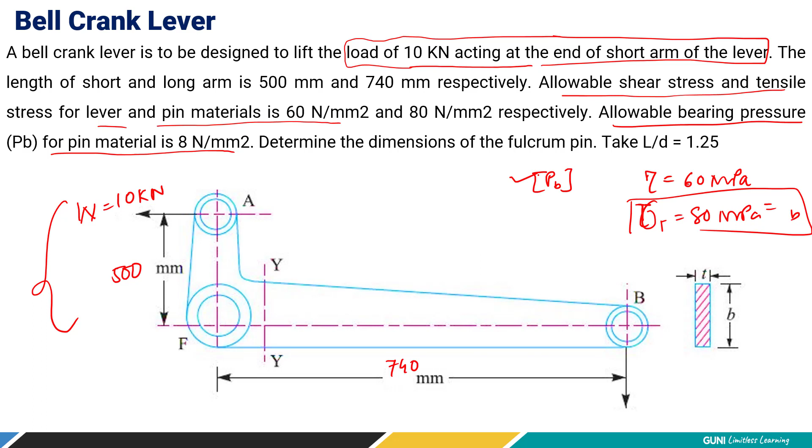Allowable bearing pressure for the pin material is 8 Newton per millimeter square, which we are going to write as PB. It's a bearing pressure, basically a compressive stress, but because the lever pivots about a fulcrum pin, it is a dynamic condition, so we cannot use directly the compressive stress. Instead we have to use the word bearing pressure. So it is given as 8 Newton per millimeter square, or simply 8 megapascal.

Second, the relation of the pin is given: L by D is 1.25. That means length of pin is 1.25 times, 25% higher than its diameter. This relation is given to solve the problem.

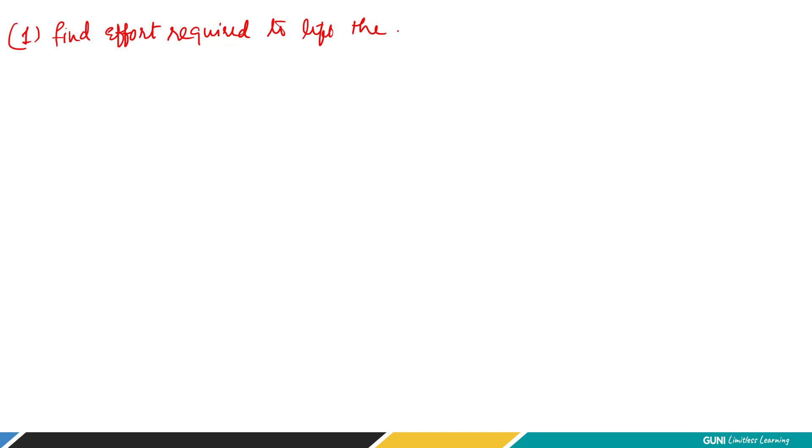So the first step is we must find the effort required. Here the load is given to us, but we need to find how much effort is required to operate this lever to lift this load of 10 kilonewton. By definition of lever, we must have a lower value of effort, otherwise the definition of lever has no meaning, because lever is a device used to apply less effort and to lift the higher load. So the first step is to find the effort required to lift the load of 10 kilonewton.

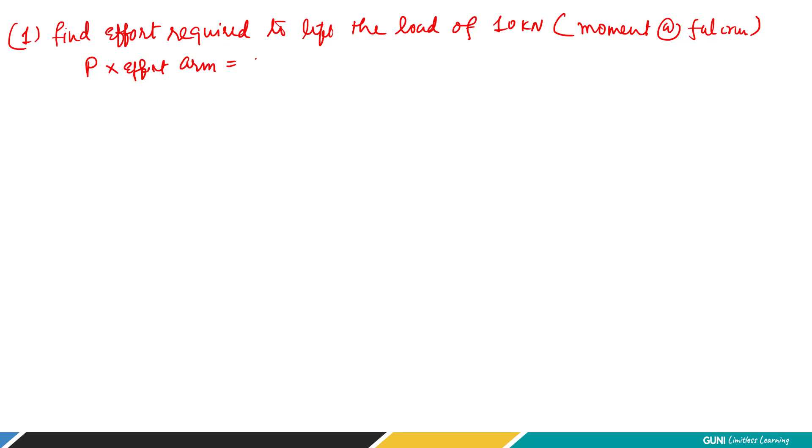How can we find it? Very simple, by considering the principle of moments, taking moment about the fulcrum. So effort into effort arm is equal to load into load arm. How much is it given? P into 740 millimeter is equal to load given 10 kilonewton, I am keeping it in terms of kilonewton, into 500. So from this we can find the effort required. P is going to be 6.75 kilonewton, so this is the effort required.

Just try to focus on the values. Now load we are lifting is 10 kilonewton and the effort required for that is 6.75, so here the effort required is very less. Now from this moment about fulcrum principle, we can say if we increase this effort arm, we'll still have a lower effort, but there is always a limitation of space, so we cannot enlarge the lever for an infinite distance. So here, by considering data, we have to apply this much of effort in terms of kilonewton.

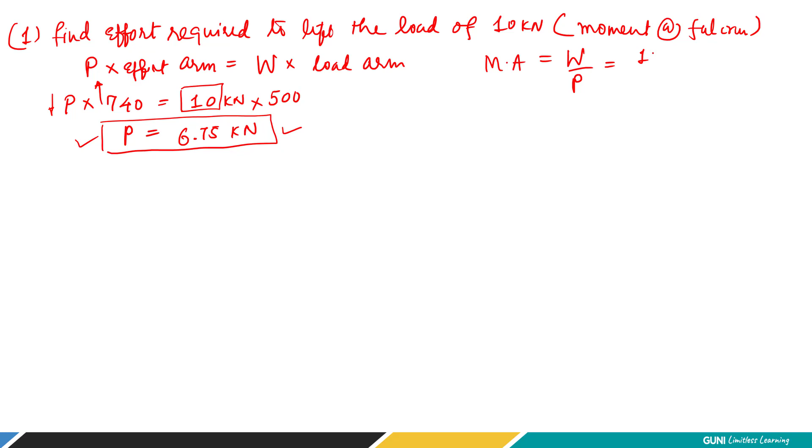Now, if you want to find out mechanical advantage, what is that? Load divided by effort applied. Here it is 10 kilonewton and the effort we applied is 6.75, so the output is 1.481. So this lever that we are considering is having mechanical advantage of 1.481, that means we can have a 48% lower effort with respect to the applied load. This is the advantage.

Now let's find the reaction force. The second point is finding reaction force. You do have to write in similar manner in exam. Reaction force RF on fulcrum pin.

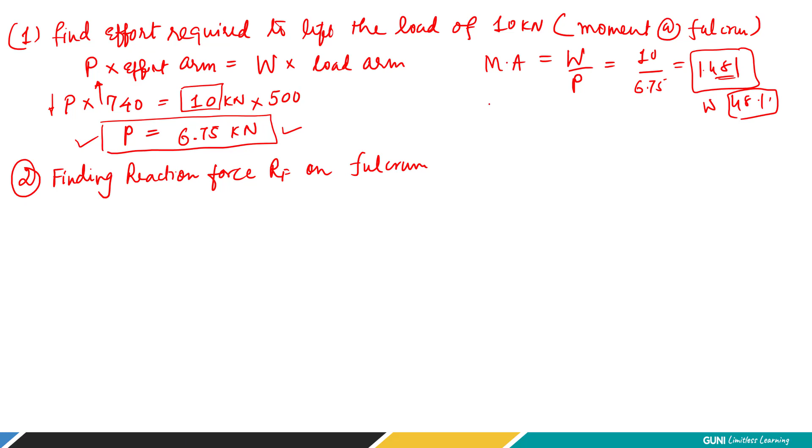Lever is a single entity. Here we are applying W, we are lifting W load, and here we are applying the effort P. So these two forces, if you consider the law of parallelogram or triangle law, this is going to give you the equivalent force.

We are replacing W and P, and finding a single force called reaction force, which is acting on this fulcrum pin. That is RF. So on fulcrum pin, reaction force can be found out by this equation: R equals square root of W square plus P square minus 2WP into cos theta.

But here, for Bell crank lever, theta is 90 degrees. So this term becomes zero. So we have the reaction force equation simplified as W square plus P square.

So let's put the value of load, that is 10 kilonewton, and this is 6.75. So let's find the answer for R. It comes out to 12.06 kilonewton.

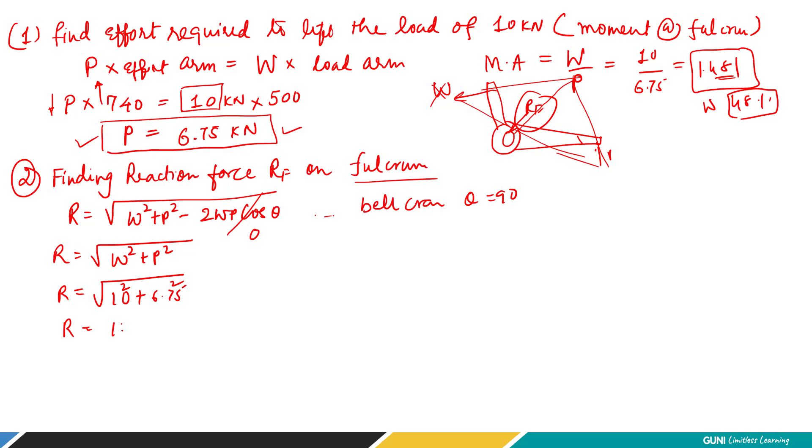So this much load, by simply finding the reaction force, or you can say the equivalent force by replacing these two values, we get one force giving a 12.06 kilonewton effective load acting on this fulcrum pin. This is also called resultant or reaction force.

Now from this we are going to find the dimensions of the fulcrum pin. Let's say this is the design of fulcrum pin.

The first point is how a pin is going to fail. The first failure mode is bearing failure. Because of this reaction, there are chances this pin is going to have a compressive failure. But because the lever is swiveling about the fulcrum pin every time, it's a dynamic situation. So we are going to consider its bearing failure.

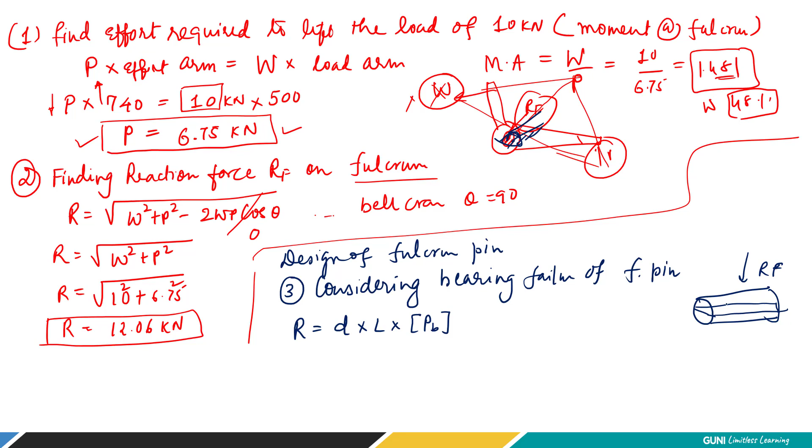So for bearing failure, the equation is R equals D into L into PB. Now how does this come? Very simple. Let me draw the bearing pin. Here we have to consider this projected area, on which the reaction force R is acting. So this area is basically D into horizontal length L.

Now here we are going to take L as 1.25 times D, which is given in the numerical. Because both terms are unknown, we cannot solve at a time, so we have to take a relation. A rectangle means an area, so we can take a proportion of these sides. Here the proportion taken is that length is 25% more than the diameter.

So here we can replace it: R is 12.06 kilonewton, that is 10 raised to 3, replacing kilo. Then D into 1.25D, and the bearing pressure given in the numerical is 8 megapascal, that is 8. Please watch out for the units - you must have a common unit on left side and right side. Here it is Newton, so the bearing pressure has to be taken in terms of Newton, not kilonewton.

So finding this diameter D of the pin, the answer is 34.7 millimeter. So we can take it as 36. We keep the diameter of pin as 36. So length will be 45, 25% higher as given in the relations. This is the dimension we found out based on the load acting.

How much load is acting? Reaction force 12 kilonewton. So for the given load, you have to keep this much dimension of the fulcrum pin, which will give you safe working under the bearing failure condition.

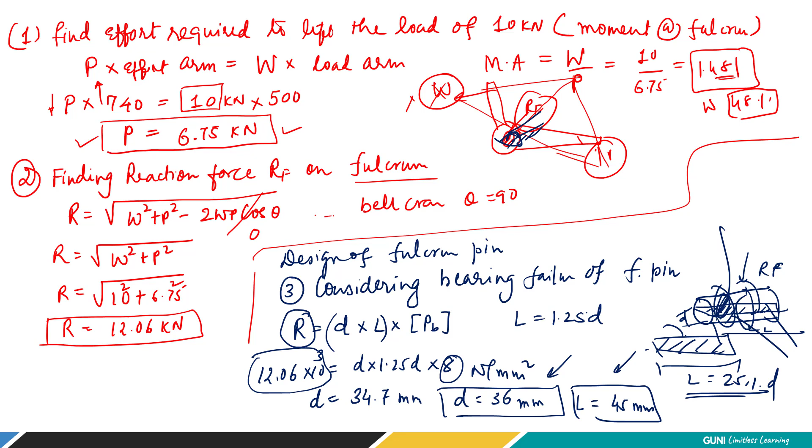Now the same pin subjected to bearing failure is also subjected to shear failure. It can happen that because of the boss connection of the lever, there are chances the fulcrum pin is going to fail from this location and this location. So it shears off from this location and this location, both being circular areas.

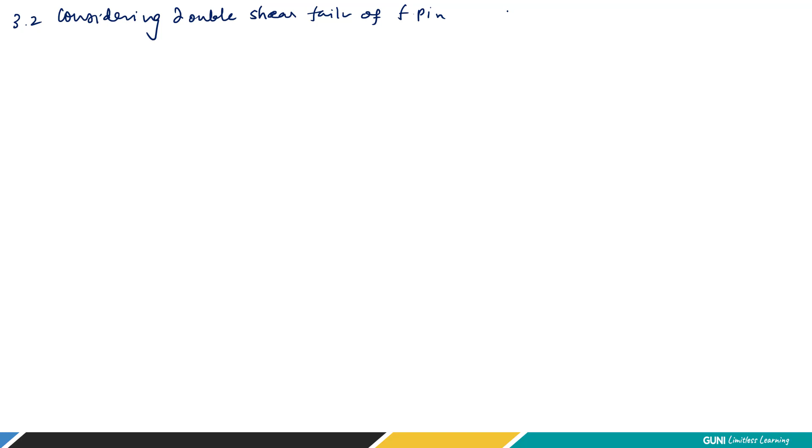Let's try to consider it. So here, considering double shear failure of the fulcrum pin - how much is it? The same reaction force is causing the double shear failure, so the equation is pi by 4 d square into tau, multiplied by 2.

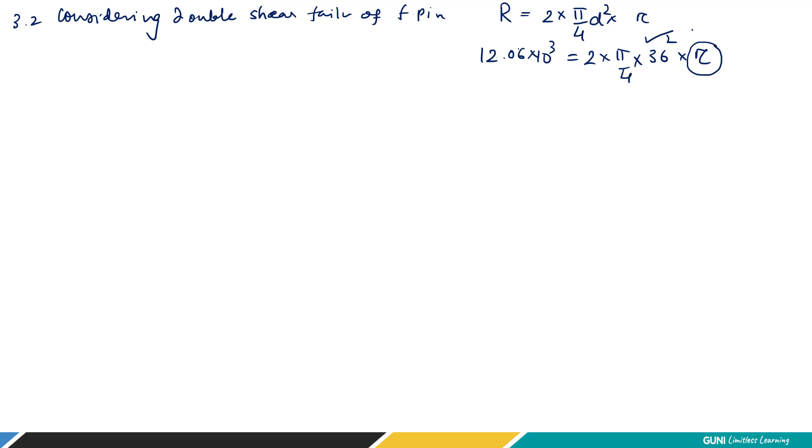So here reaction force is known as 12.06 into 10 to the power 3, equals 2 into pi by 4. Now we know the diameter of pin, that is 36 square. Let's find the induced stress - here we are going to find the shear stress induced. We already have the dimension that we found out from the bearing failure, but the same dimension must be proved to be safe under the working loading condition in shear failure.

So we are going to find the shear stress in this case, and that comes out to be 18.61 megapascal, right? Now the permissible stress given, induced stress is 18.61 for the diameter D equal to 36. What does this mean? The pin dimension we found, which is 36 in diameter and length is 45, is going to work safely in bearing failure as well as in shear failure. But in shear failure, how much stress is developing? 18.61.

We have to compare with the given value. Here the given value is 60, right? So permissible is 60 and the induced stress is 18. So you can say the induced stress is much less than the permissible stress, which is 60. So here we can conclude that the fulcrum pin is safe in both situations, that is bearing failure and shearing failure. So this is our design.

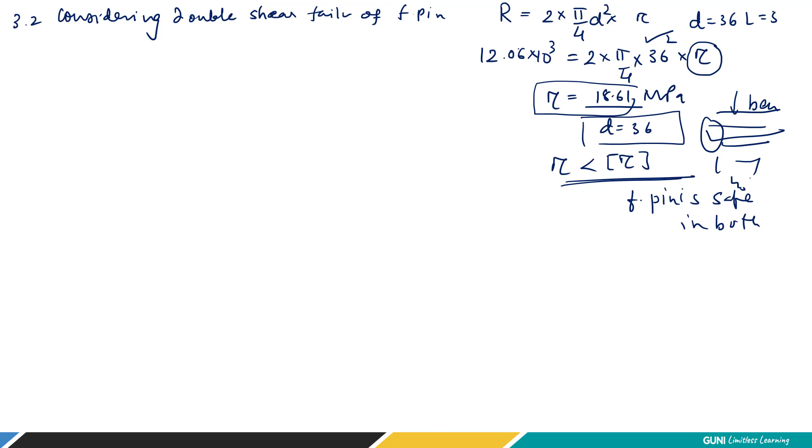So fulcrum pin dimension is D equal to 36 and length equal to 45 millimeters. So this is our final dimensions. Now let's talk about the cross sections, right? So point number 4, lever cross section.

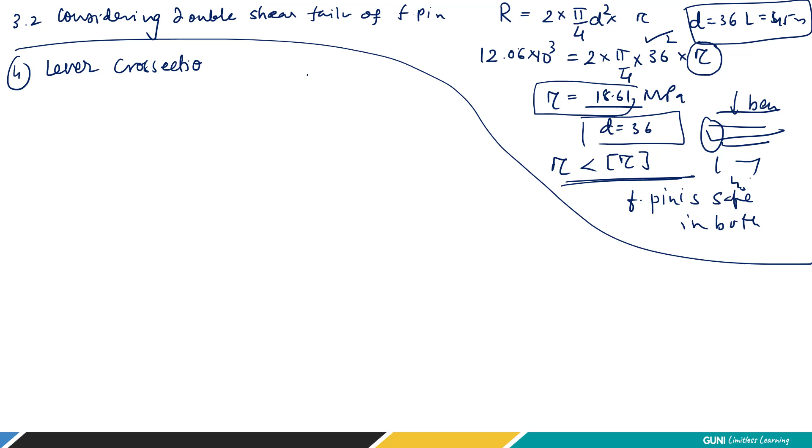Now try to understand what this means. Let me draw over here so you can understand very well. So this is shorter arm, this is longer arm. Let me explain on the main figure. Now here, let's say this is the fulcrum pin. This is the point from where the lever behaves like a cantilever beam, right?

So here what do we need to consider? Fixed point, right? So this is the cantilever beam. You are applying an effort of, let's say, 6.75 kilonewton, and the distance is given. So because of this force and its perpendicular distance, it is going to create a moment. So the moment is on the right side as given, right? So because of that, the stresses will be developed at this location.

Bending stress or bending moment will be maximum at this location. If you recall your knowledge of strength of materials, the bending moment value is like this. It is maximum at the fixed point, right? It is maximum, and gradually it reduces to zero because the reference dimension or the linear distance is getting zero, right? So this is the triangular pattern of bending moment.

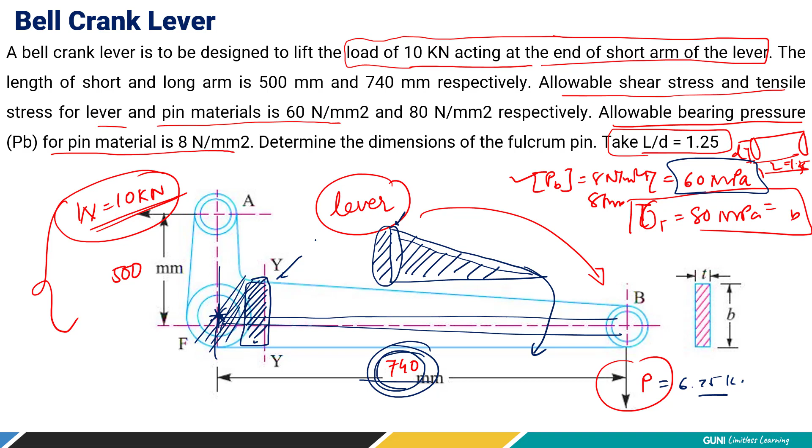And because of that, the bending stress is also higher at this location. So bending stress is nothing but bending moment divided by sectional modulus Z, right? So here at this location only we have to find out what is the height of section and what is the width. We are not going to find the rectangle section at other locations, because there the bending moment is very low. As a design engineer, we must concentrate on the maximum value of stress.

So in the case of the lever, the maximum stress occurs only at this location because the bending moment is maximum at the fixed location, or you can say where the lever is pivoted by the fulcrum pin, right? So here we are going to find it. So the section that we are going to find is at this location. Mostly a rectangular section is preferred, like a column and beam, right?

So here the cross section is like this. This is height and this is width, okay? So you can keep an I-section as well, but it depends on how much load is acting and how much bending is occurring, right? But generally, for the sake of understanding, let's go for the rectangle section. So the lever section can be found out by bending stress equals bending moment divided by sectional modulus Z.

Where will we get the dimension from? We will get it from here. So Z is simply the moment of inertia divided by Y. Y is nothing but the extreme distance of the extreme fiber, where the maximum bending stress is occurring. That is, let's recall the bending formula or bending concept, right?

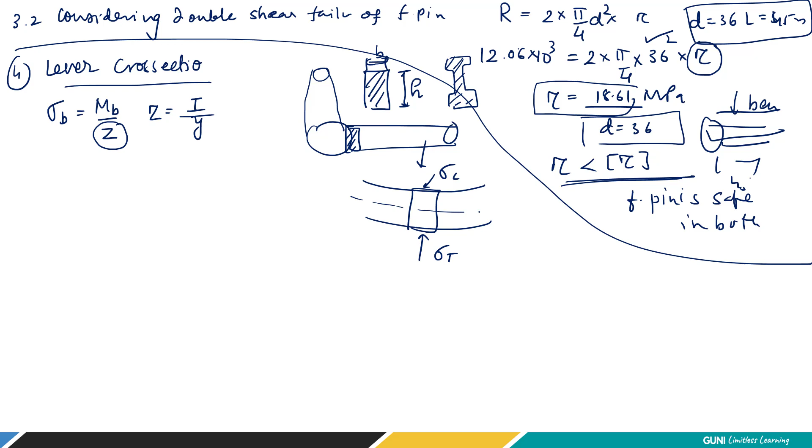If you bend it like this, the inner portion is subjected to compressive stress and the outer fiber is subjected to tensile stress. And from the neutral axis, we want to find out the location. So depth is H and the half is Y. So Y means H by 2. So we are going to find the extreme fiber where the maximum stress is occurring.

Just recall the pattern of the stresses: on one side it is compressive, on the other side it is tensile. Both have the same value but opposite nature because of bending.

Here we are interested to find the moment of inertia value, that is 1 by 12 BH cube. Just recall your knowledge of moment of inertia from strength of material. Here we are going to replace Y with H by 2, which is the location of the extreme fiber from the neutral axis. So we cancel out one H, and the total becomes 1 by 6 BH square.

Now let's find the bending moment. Bending moment can be found by effort into effort arm, or simply load into load arm. Both are going to give the same value. Here the load given is 10 kilonewton, and its distance is given as 500.

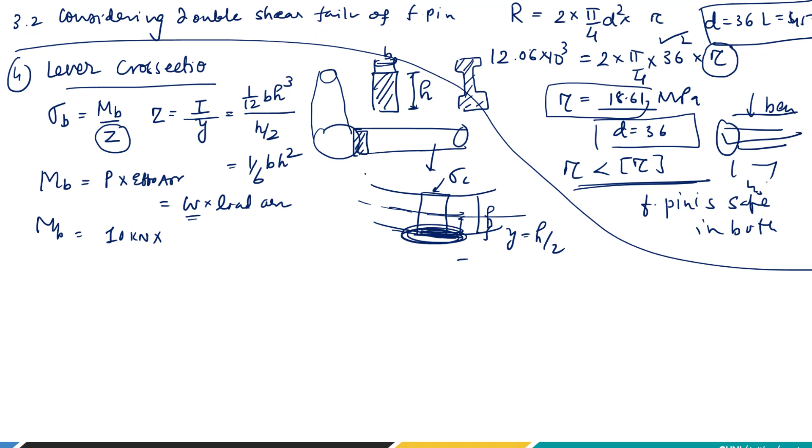So the moment will be 5000 kilonewton into millimeter, because the load is in kilonewton and the distance in millimeter. Now let's use this equation: bending stress equals bending moment divided by section modulus. So it is 5000 into 10 raised to 3, and we are replacing section modulus with 1 by 6 BH square.

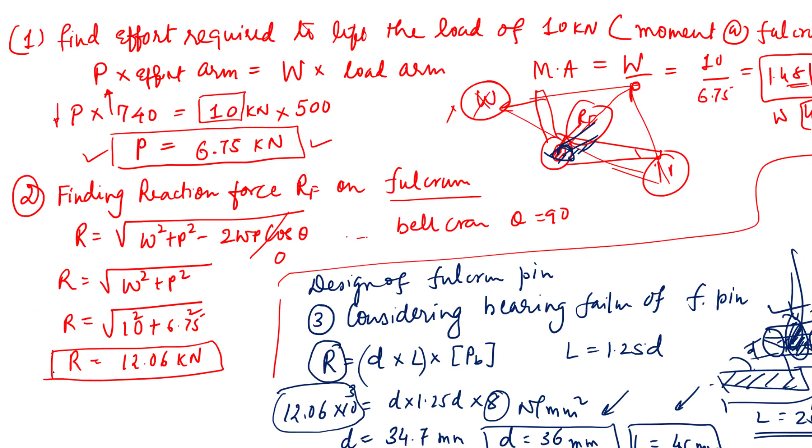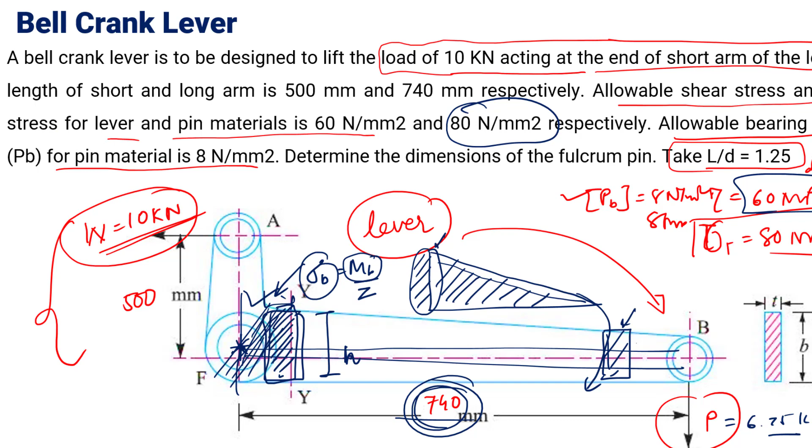You know that the bending stress given is 80. That value is given in the numerical. Because of bending, the stress produced is either compressive or tensile in nature. Here it is given in tensile nature, so we have to consider it equivalent to the bending stress. The permissible value is given.

You're not allowed to go beyond this value. So one variable is known to us; the bending moment we found out, but we don't know the B and H values, which is the dimension we are interested to find. So together they are unknown, and we cannot solve this equation directly. We have to take a relationship.

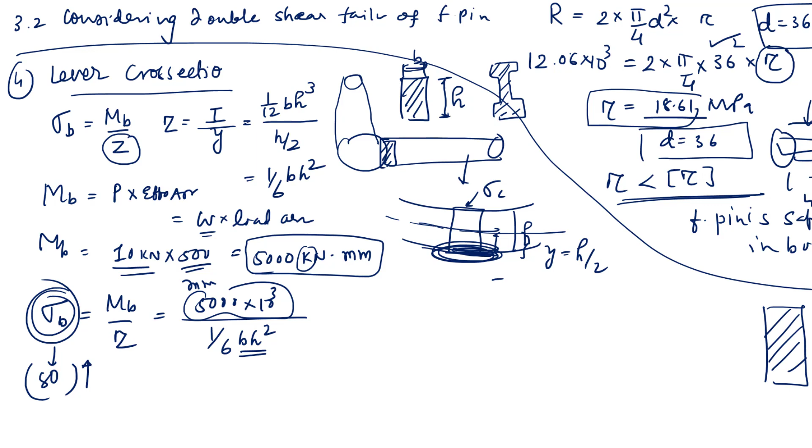Because the section is a rectangle, we can take a relation between the sides: this is H and this is B. Since it is not given, we can assume it arbitrarily. So we take H equal to 3 times B. This assumption will help us solve the equations.

So let's put it: 80 equals 5000 into 10 raised to 3, divided by 1 by 6 of B and H, which gives us 9 B square. From this we can find the B value. Solving this, B comes out to be 34.66 millimeter, so we take it as 36. Based on that, H will be 108.

So this is the cross section that we have to keep for the lever, for the applied load of 10 kilonewton at the shorter arm and the effort of 6.75 kilonewton at the longer arm. We have to keep this value, otherwise it is going to bend or fail, meaning the stress induced will be more than 80, which is a failure situation.

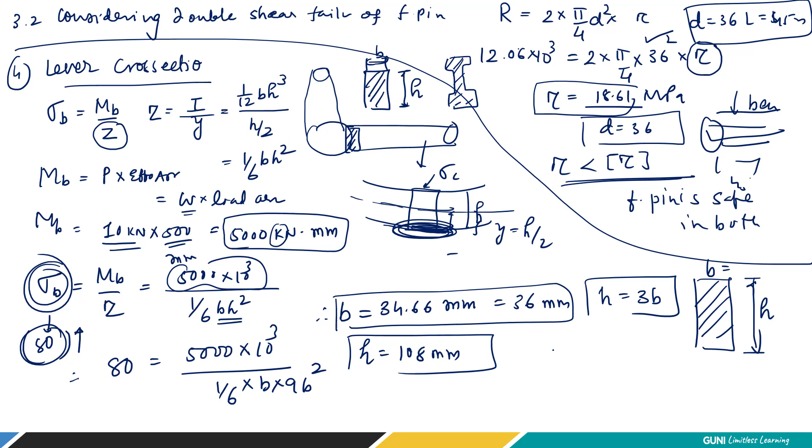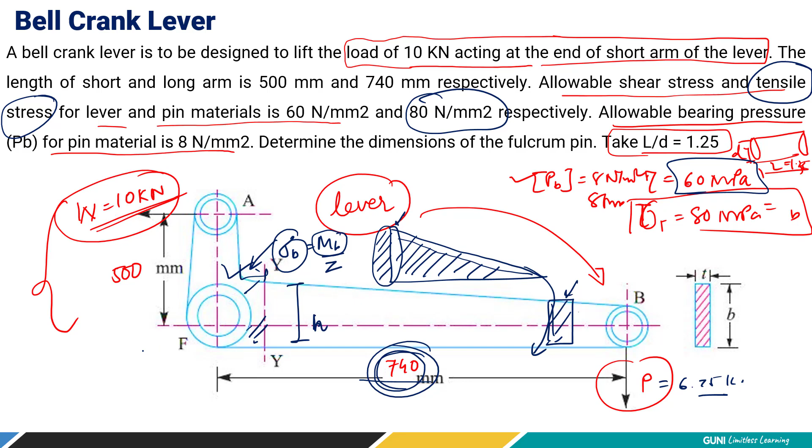So this is how we can solve the design of the lever. Finally, we can find the dimension of the boss. Let me show you on the slides. This is the boss, in which the fulcrum pin is fixed. That dimension is taken as 2 times the fulcrum pin. The fulcrum pin dimension is 36.

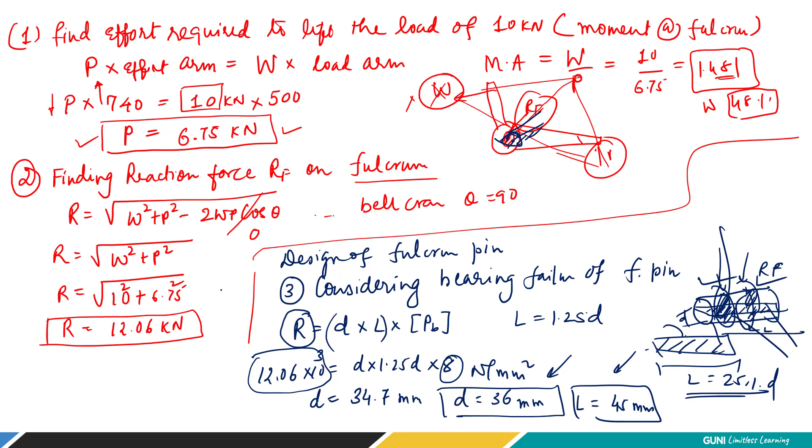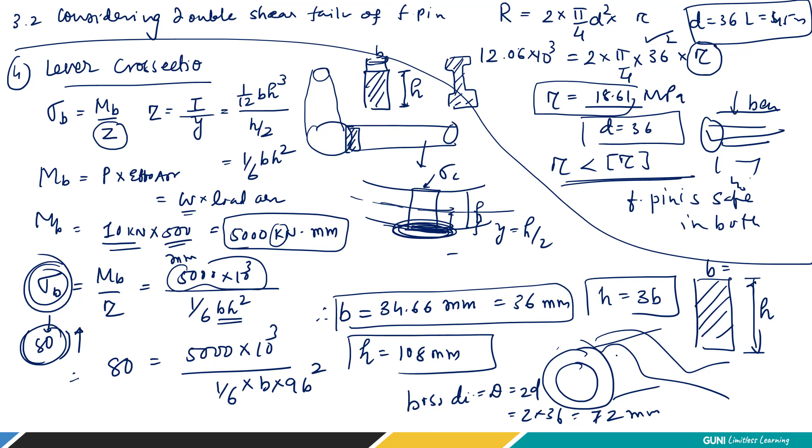So we can say the boss diameter, capital D, is taken as 2 times the pin, so 2 into 36. So the boss diameter will be 72 millimeter. This is the design of the lever.

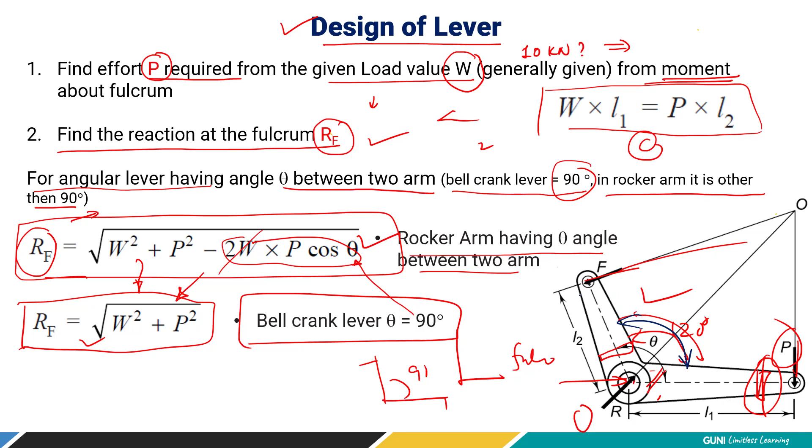Now let's solve one more example, rocker arm. Basically rocker arm is like this as shown in the previous figure. This is the example of rocker arm, where the angle is other than 90 degrees. It is basically used in IC engine. Let me show you in a figure.

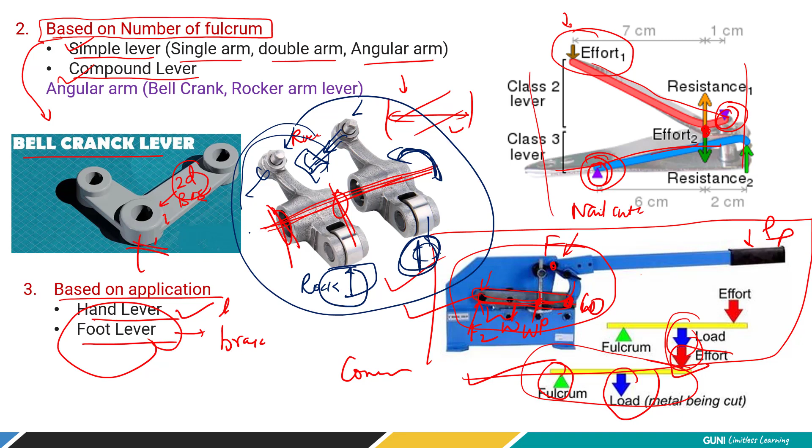So this is the example of rocker arm. This is the tappet end, where we are going to fix a valve which operates in the engine cylinder. From here we provide the push from the cam. I hope you have studied this in theory of machines. The cam rotates and pushes it, so it swivels like this, and that operates the valve, opening and closing it. So this is an example of a rocker arm.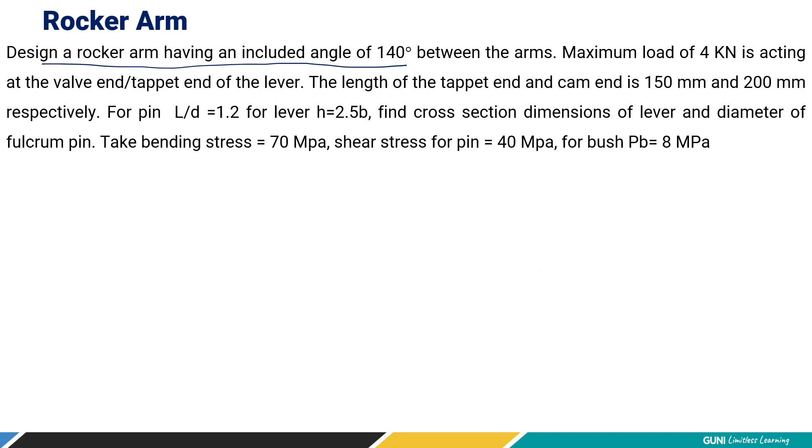So, design a rocker arm having included angle between two arms theta equal to 140 degrees. How much is given? It is given as 140. So simply draw a figure like this to understand it, so this angle is 140 between the two arms.

Now, maximum load of 4 kilonewton is acting at the valve end or tappet end, so here W is 4 kilonewton. And the length of the tappet end and cam end is 150 and 200 respectively. So we are going to apply effort P.

Now for the pin, length to diameter ratio is 1.2, so L is equal to 1.2 times D. And the lever cross section is given as H is equal to 2.5 times B. So the relation is given for the dimension of lever and the diameter of fulcrum pin.

Take the bending stress as 70 megapascal. And the shear stress is 40. And the bearing pressure is given as 8 megapascal. Now let's design the cross section.

The first step is always to find effort P required. That comes from the principle of moment, moment about the fulcrum. So P into effort arm, equals load into load arm. So P distance is 200, load is given as 4 kilonewton, which I'll keep in kilonewton.

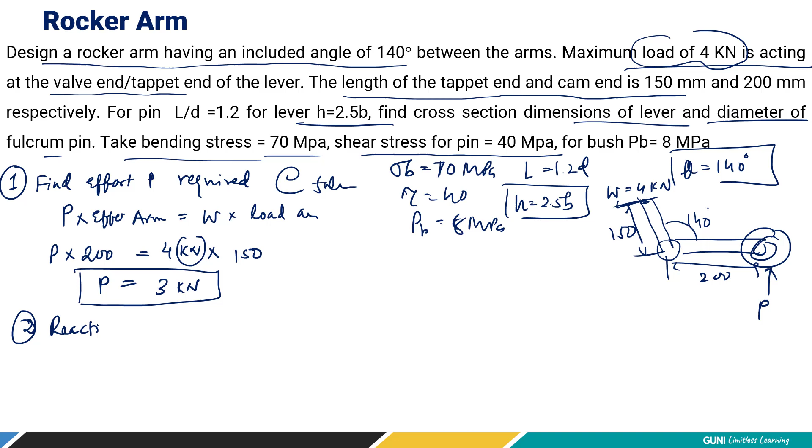Now let's find the reaction force on the fulcrum pin. Here we have to use R equals square root of W square plus P square minus 2WP into cos theta. Because theta is given as 140, not 90, we have to replace theta with 140. So for reaction R: W is 4 kilonewton, effort is 3 kilonewton, 2 into 3 into 4 and cos 140.

You can calculate using a scientific calculator. So it's going to be 6.58 kilonewton. This is the final answer for reaction force RF acting on the fulcrum pin. So by using this force, we have to find out the dimension of the fulcrum pin.

So let's find point number 3: design of fulcrum pin. Considering bearing failure first. So that is R, D, capital length and the bearing pressure PB.

So here R we found out to be 6.58 into 10 raised to 3, we simply remove the kilo. Then dimension D, length relation is given as 1.2 times D, into bearing pressure given as 8. So let's find the pin dimension: 26.80 millimeter. So these are the dimensions.

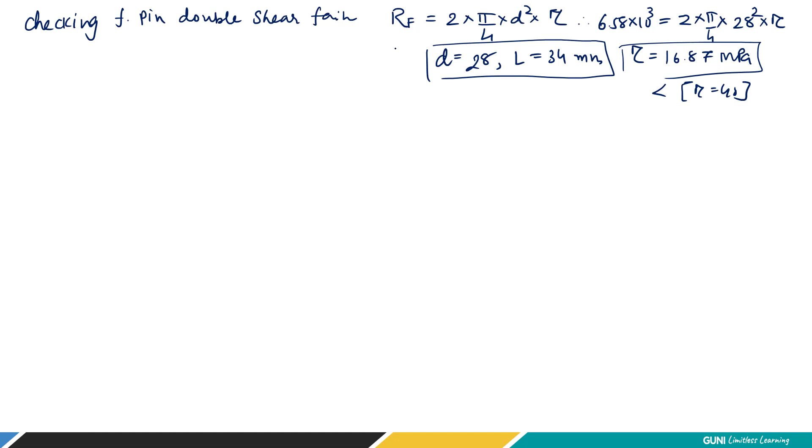Now let's find the cross section. Number 4 is cross section of lever. Let's find it. Considering the rectangle section, that is H and the width B, we have bending stress equal to bending moment divided by section modulus Z. Here Z is going to be 1 by 6 BH square. Now H is given in terms of 2.5 B.

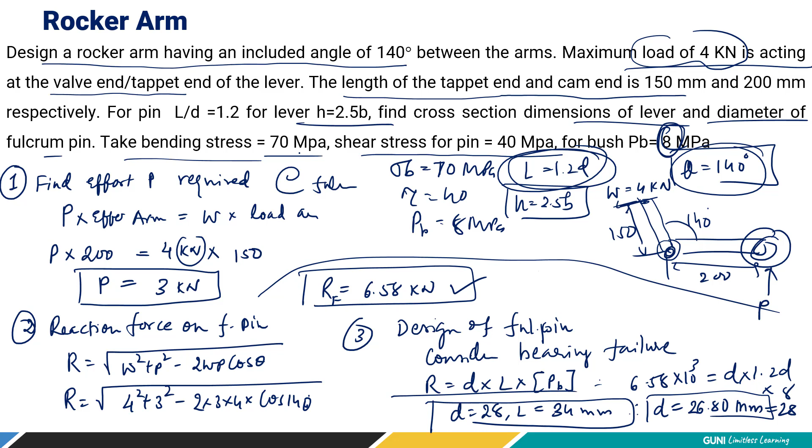Relation is given to us, we can replace it. So let's find the bending moment. Here it is load into load arm. Let's say load is how much it is? 4 kilonewton. 4,000 into its distance. What is distance? Distance is given as 150. So this is load arm distance.

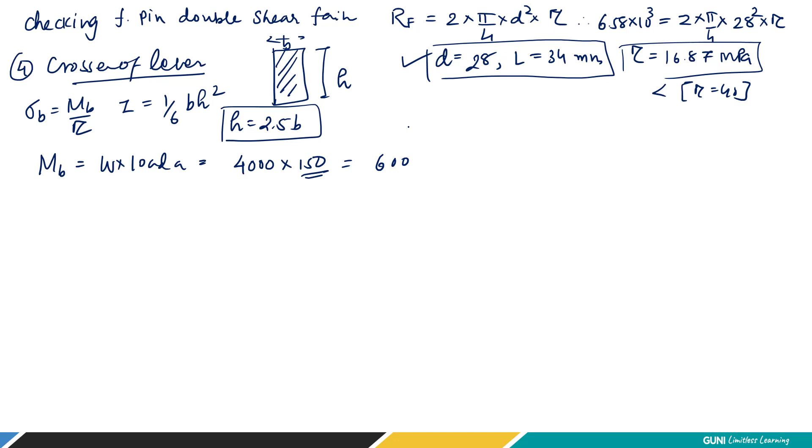So finally we have 600,000 Newton into millimeter. All load is in terms of Newton and distance is in terms of millimeter. So finally 600,000 Newton millimeter bending moment. Now the bending stress given is 70, right? So we have to take 70 value.

So here bending stress equals bending moment divided by section modulus Z. 70 is the given permissible value, and this is 600,000 divided by 1 by 6 into B into H square. So we are going to replace this H. So here it is 70 equals 600,000, you can just take the 6 upside, right?

So to 6, it is B into, we have 2.5 times B square, right? So these are the B terms. Now it is very simple to find out the value of B. B comes out to be 20.18. You can take it as 22 millimeter.

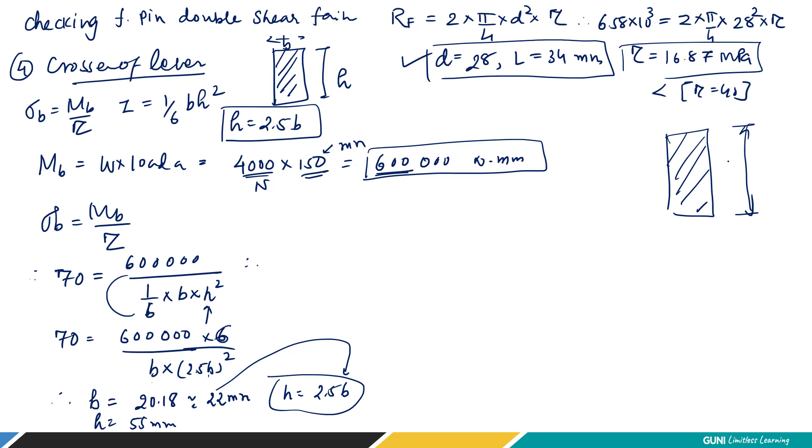So the height, similarly, height will be 55 millimeter. How it comes? 2.5 times. So height simply comes from this equation relation. You have to replace this 22 over here, so you can find the height. So the cross section is, let me draw it: the height we have to keep is 55 millimeter, and the width we have to keep is 22 millimeter.

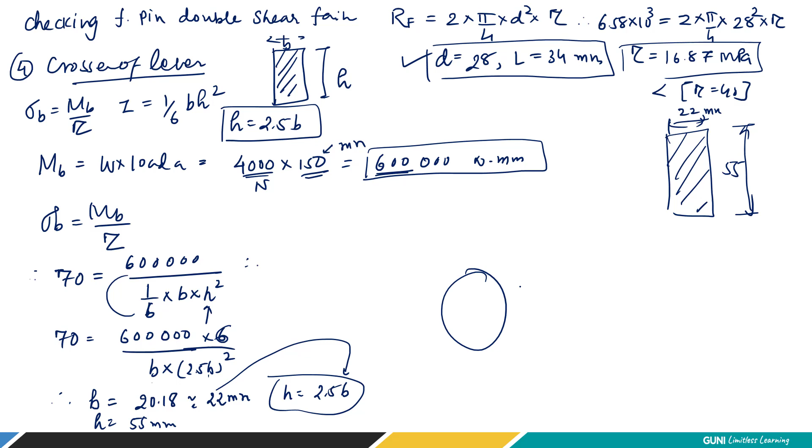So we have designed a rocker arm. Let's say this is simply a rocker arm, a simple sketch to understand it, right? So here we have to keep a rectangle section. This is the location where the maximum bending moment is going to occur, hence the bending stress. Maximum bending moment means maximum stress, and at that location we have to find out the cross section.

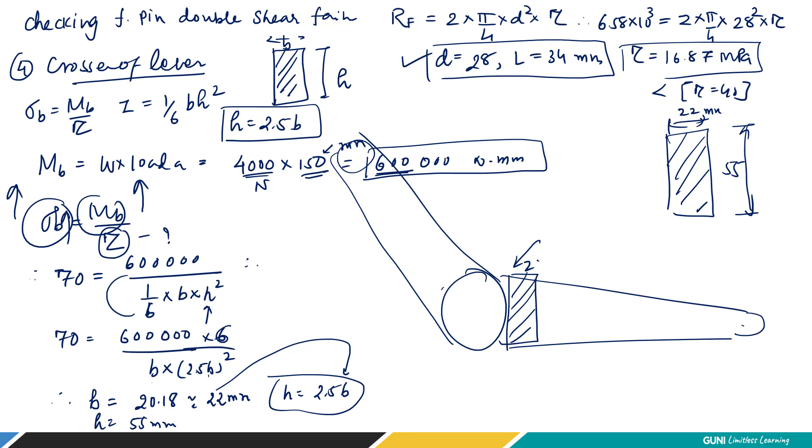That will reduce the induced bending stress. So we find out numerically this is going to be 22, and the height is going to be 55. So this is the minimum value you have to keep. If you lower it down, it is going to fail. If you increase it, it is simply a higher size, or you can say it is not an optimized design. So this way we can find the cross section of levers.

Now finally, let's find the boss diameter. So this is the boss diameter, and that is given, very simply, as capital D equals 2 times pin diameter. So here 2, and the fulcrum pin is 28, so it is going to be 56 millimeter, right? So this part is going to be 56, and the inner part is going to be 28.

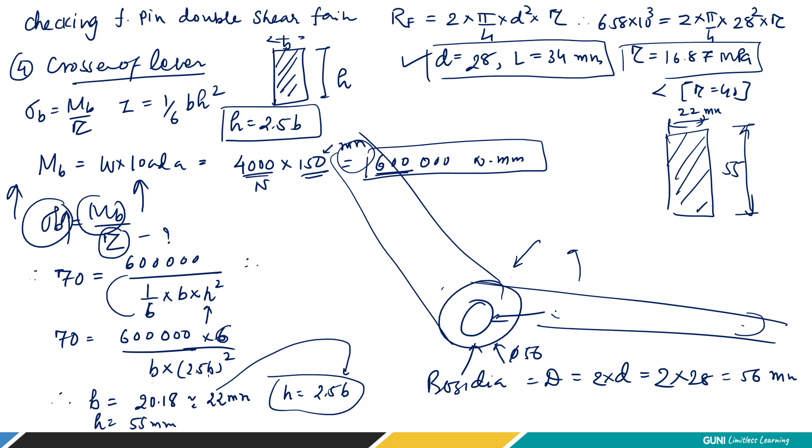I hope it is clear to you. If you have any doubt, please raise your questions.